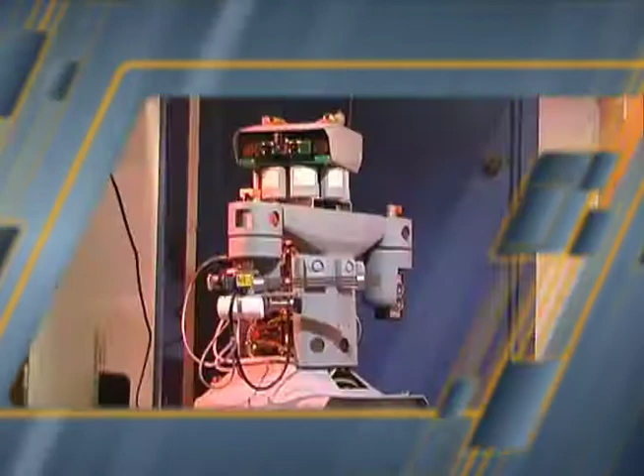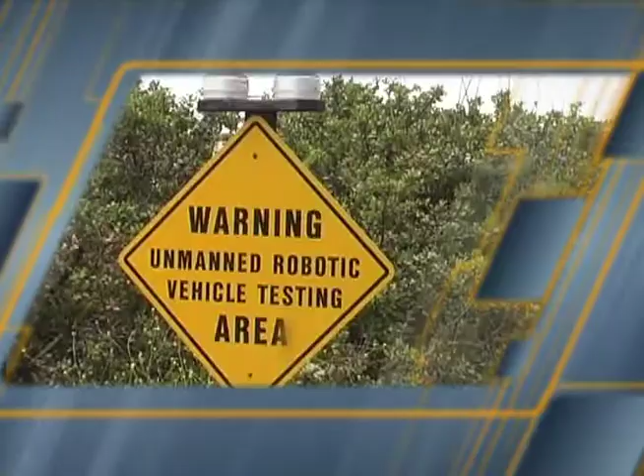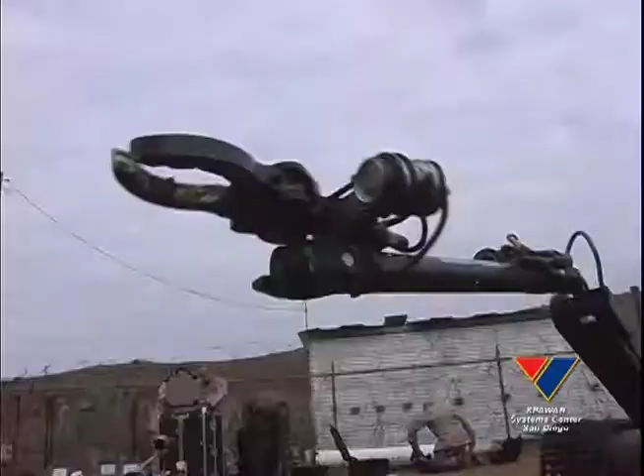The majority of today's unmanned ground vehicles are teleoperated, doing what and only what the warfighter directs them to do. While such systems save lives, lack of onboard intelligence limits the range of possible missions and can put operators in harm's way.

The Space and Naval Warfare Systems Center, San Diego, has been a pioneer in robotics since early work in unmanned undersea vehicles in the 1960s.

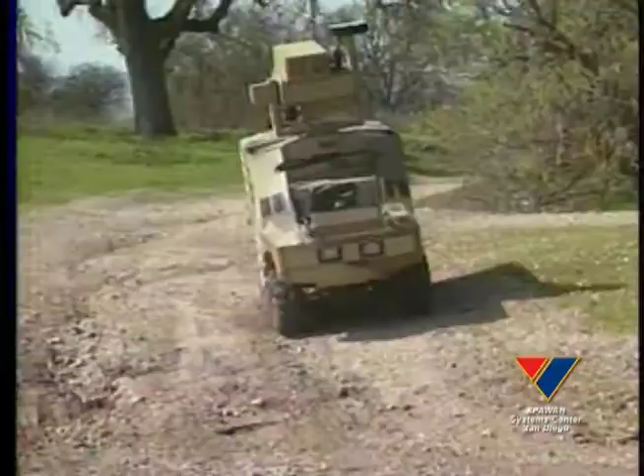The Ground Robotics Program, initiated in 1982, produced a series of teleoperated vehicles performing recon and surveillance for the U.S. Marine Corps, expanding into autonomous security robots for the Army in 1990.

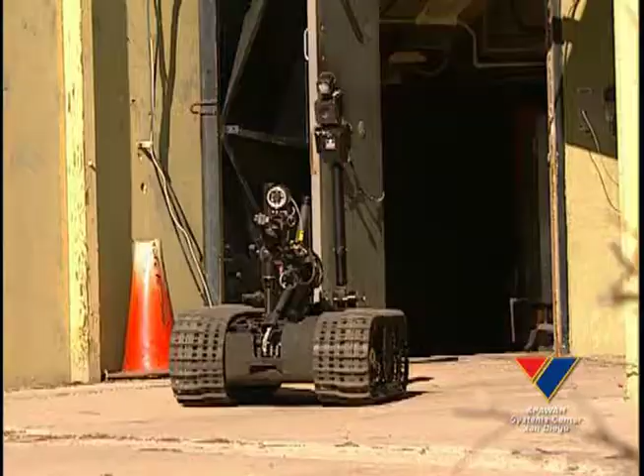The center began supporting unmanned surface vehicles for the Navy in 1999, and later established a focused effort to enhance the autonomy of man-portable systems used in explosive ordnance disposal.

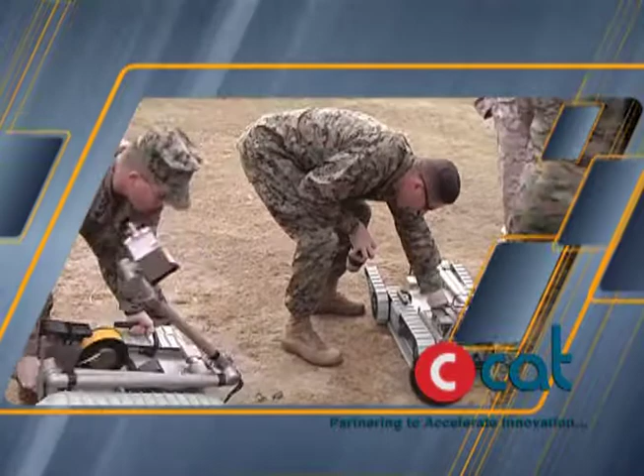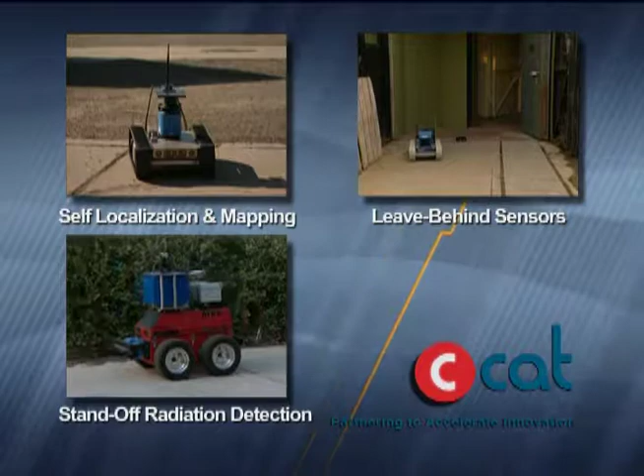The center recently teamed with CCAT, the Center for Commercialization of Advanced Technology, to fast-track the adaptation of several new technologies in support of the warfighter's associate concept, including localization and mapping, leave-behind sensors, standoff radiation detection, and human-robot interaction.

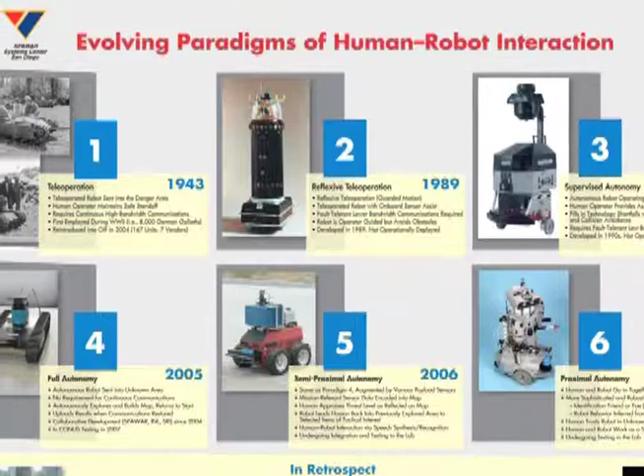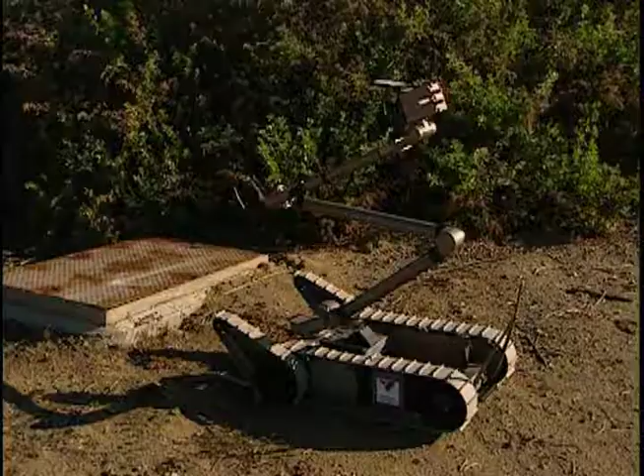Paradigm 1 is basically a teleoperated robot. This is what the Germans used in World War II, and this is actually what we have over in theater today. You have an operator who controls the robot with a joystick, and basically the robot has no onboard intelligence and no sensors.

Anything you want that robot to do has to be controlled by the operator. The problem with this is the operator has to carry a very bulky control unit, and secondly, he loses all situational awareness about what's going on around him.

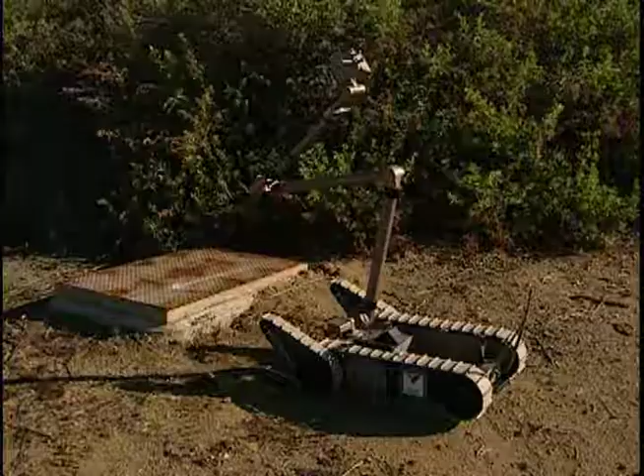If you've ever tried to talk to a kid playing a video game, you'll understand the dilemma. Basically, they don't even hear what you're saying. So this exposes the operator to danger in an environment that's inherently hostile.

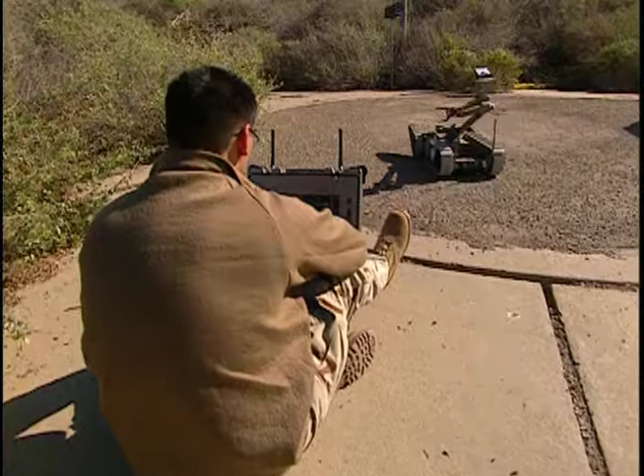Another drawback to teleoperation is that it requires a high-bandwidth communications link. Commercial off-the-shelf RF systems are not optimized for applications involving mobility and generally require an unobstructed line of sight.

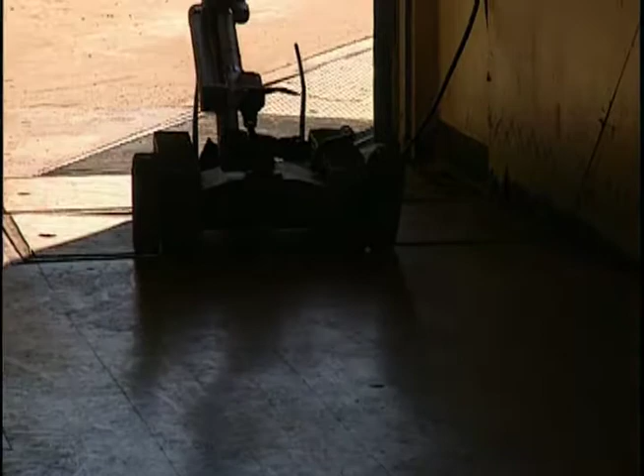For example, as soon as the robot enters this underground bunker, communications are lost and the robot slows to a halt. Risk to the human operator is significantly increased as he's forced to relocate the controller closer to the bunker entrance.

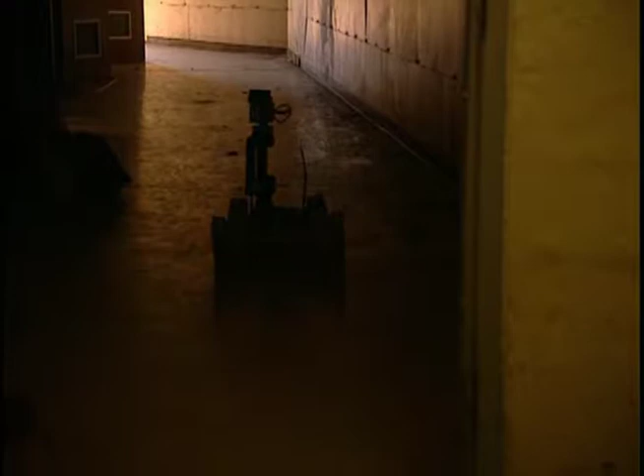As the robot penetrates deeper into the underground environment, the video quality typically degrades due to signal occlusion and multipath interference. In addition, when ambient light falls below minimum acceptable levels, the quality can become even worse.

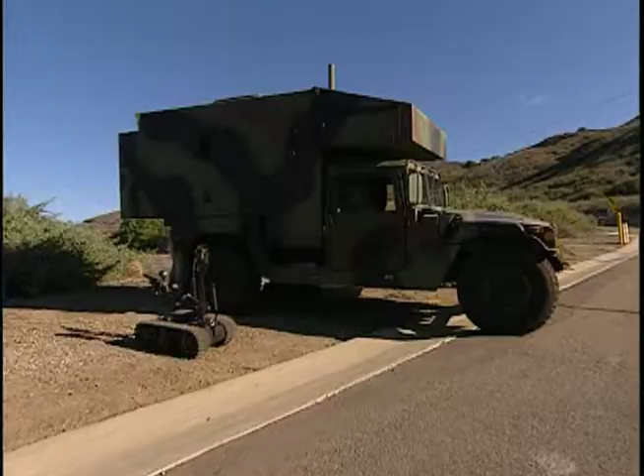A second major shortcoming to teleoperation is limited operator awareness of what is going on around the robot. Even with good communications, it's hard to get a clear tactical picture from a narrow field of view camera situated very close to the floor.

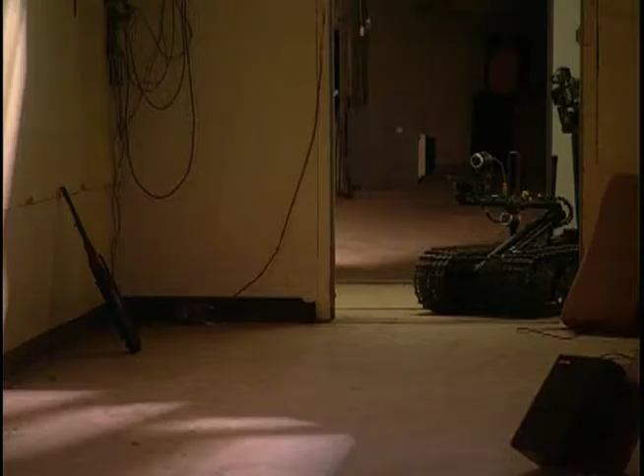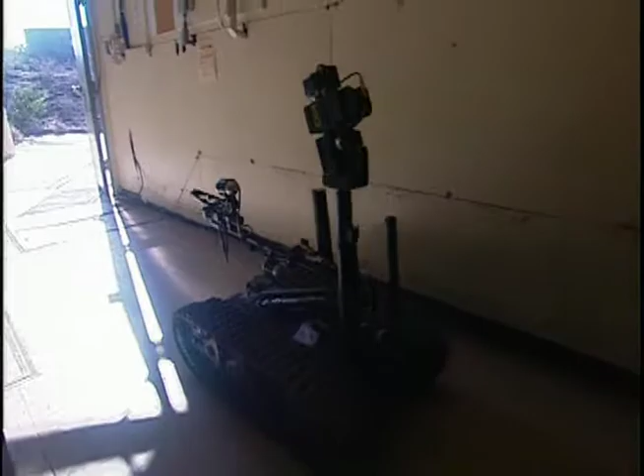Here, as the robot turns to negotiate a doorway, a weapon leaning against the wall in plain sight could escape notice due to lack of peripheral vision. The problem can be further complicated by uneven lighting conditions, such as this brightly lit exit next to a darkened corner.

Paradigm 2 is essentially the same thing. You still have a teleoperated robot, but you've now enhanced its ability to maneuver with sensors on board that can detect obstacles and maneuver around them.

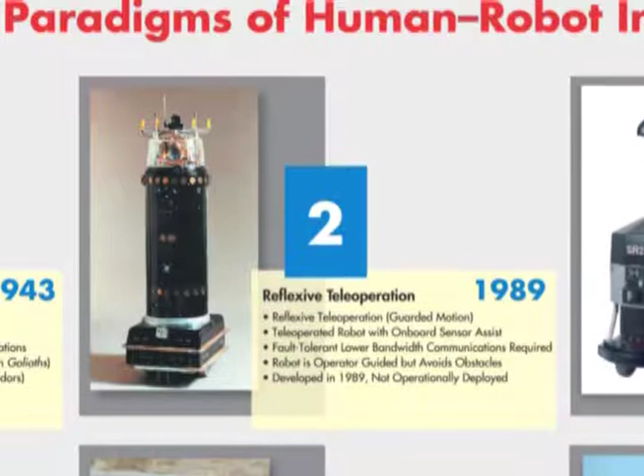The analogy is kind of like riding a horse versus riding a motorcycle. If you point a motorcycle at a tree, you're going to hit the tree. Most horses are smart enough to go around the tree, even though you may be directing the horse directly at the tree.

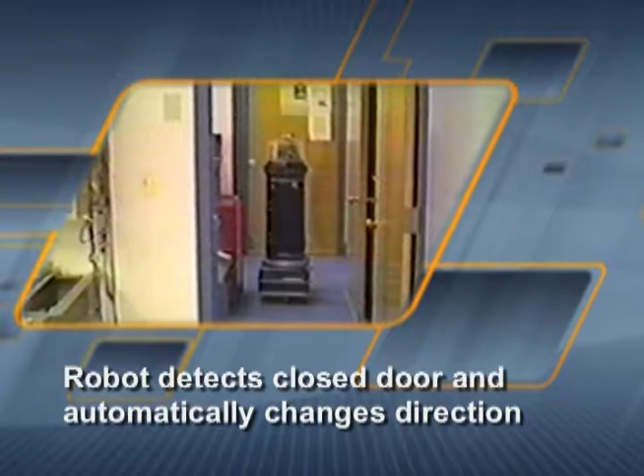So we developed this capability in 1989 in the laboratory. It just hasn't been transitioned down to the user who's operating equipment out in the field.

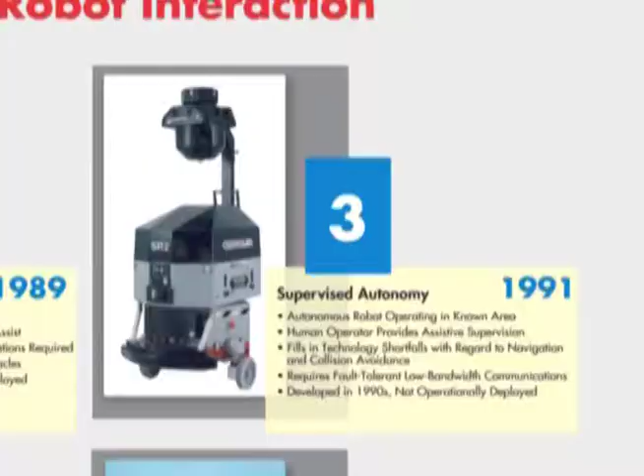Paradigm 3 we call supervised autonomy. We developed this capability in 1991. And essentially, the robot is now autonomous.

It has onboard computers that can help it plan paths and navigate and not run into anything. But there's still a human in the loop supervising the system, filling in for the technology deficiencies.

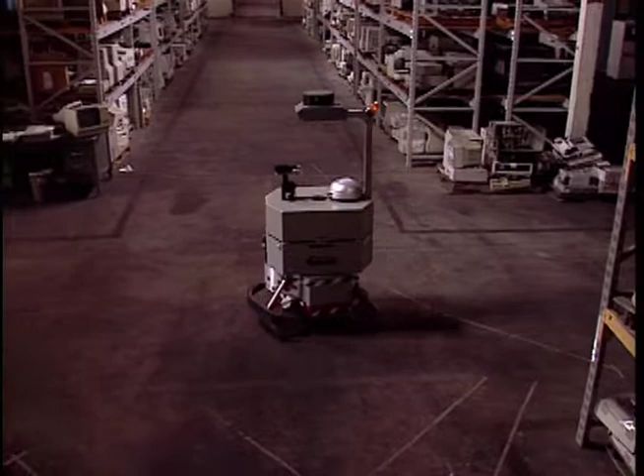One example is the human has to provide the robot with an a priori map of its surroundings so it then knows how to maneuver from one spot to the other.

Secondly, if the robot were to encounter an unknown condition like fire, smoke, flooding, or an intruder, the human steps in at that point and tells the system what to do next.

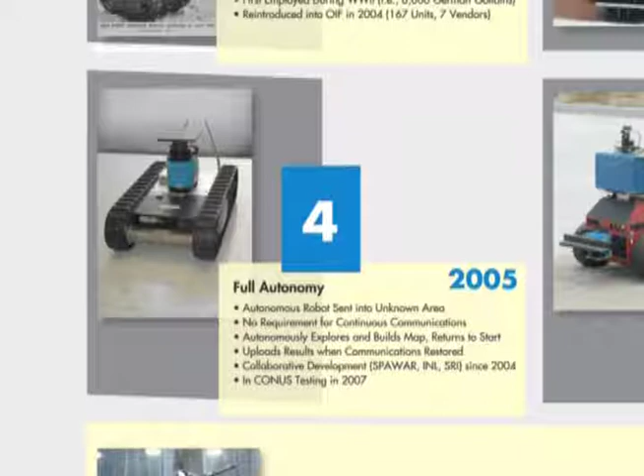Paradigm 4 is what we call full autonomy, and in this scenario, the robot requires no guidance from the human whatsoever, other than a high-level direction as to what you want it to do.

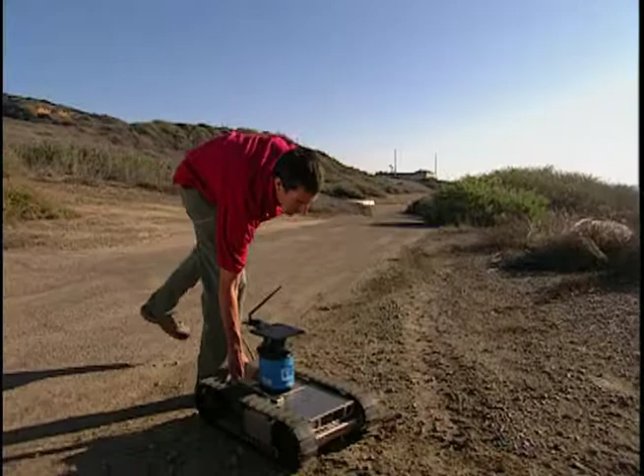This is a conventional iRobot PackBot chassis, which we've modified with a couple of payloads under the CCAT program, which provide a lot of additional capability.

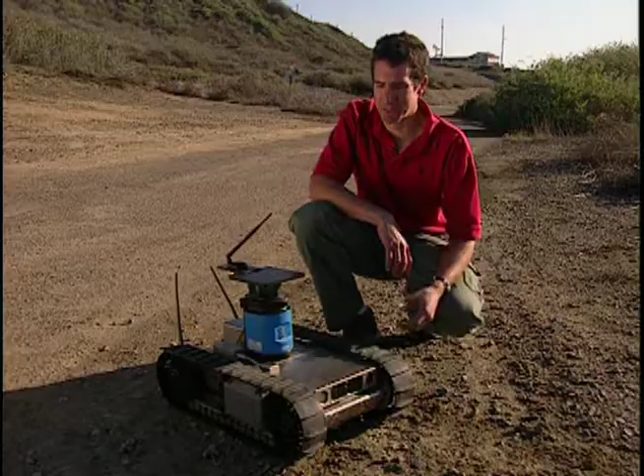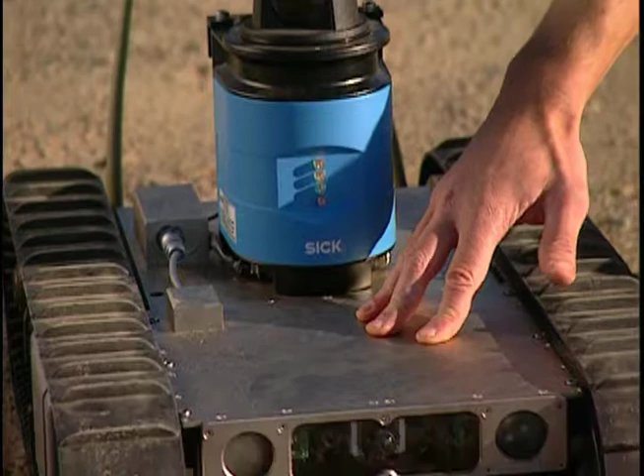One of the most important capabilities is the ability to sense things in the environment, for obstacle avoidance, mapping, and localizing the robot. The most obvious one is a laser, which measures distance very accurately in a 360-degree range around the robot. We also have a stereo sensor, which does the same thing with a little less range, but it's a three-dimensional sensor, giving us a much fuller representation than a laser alone would give.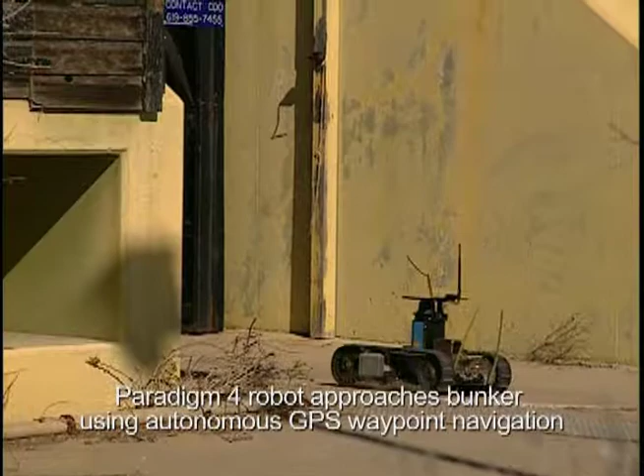This new technology has been incorporated into the Autonomous Robotic Mapping System, or ARMS, scheduled for initial user evaluation in 2008. ARMS automates the risky and labor-intensive task of exploration in unknown or hostile environments while providing extremely accurate maps of the structure. The augmented virtuality representation shown here is based upon the Idaho National Laboratory's 3D interface.

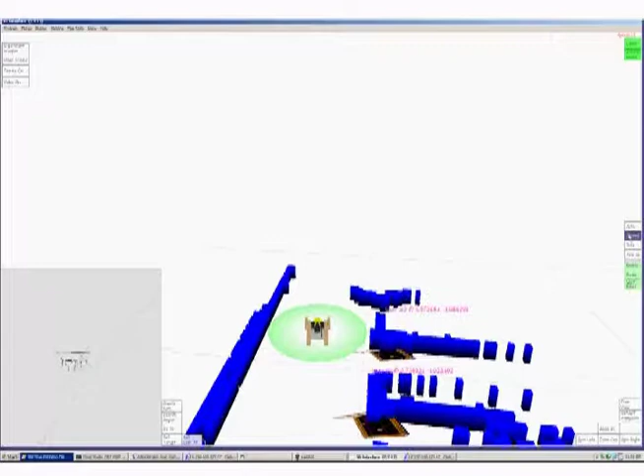This map shows walls and rooms with far greater accuracy than a hand-drawn map. Detected openings on the right side of this hallway, for example, are marked with doorway icons for later reference.

If communications are lost, the robot can still complete its search and clear mission and then return to the original point of entry.

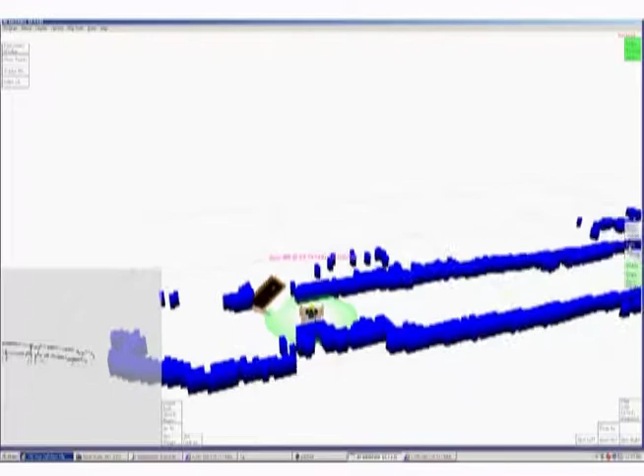So basically the key benefit of this system is it allows us to send a robot into an unknown area. It can map it out, find any dangers before the warfighter has to go in there, and it can do that all on its own, even if it loses communications.

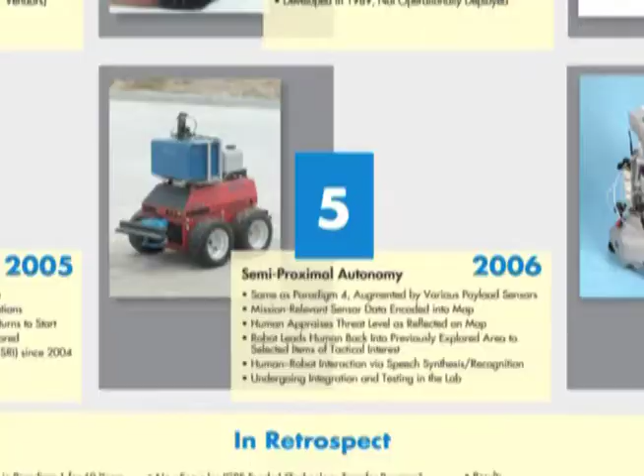Paradigm 5 is what we call semi-proximal autonomy. It's very similar to Paradigm 4, in which the robot enters an unknown area, builds a map, and comes back out and provides that map to the operator.

That's a big start in the right direction, but it would be even better if that map were annotated with anything the robot found that was of tactical significance, things the operator would want to know about — explosive residue, human presence, weapons, things of that sort.

So in this scenario, we have equipped the robot with more sensors that allow it to detect that type of information and encode it into the virtual model, and then come back out and upload that.

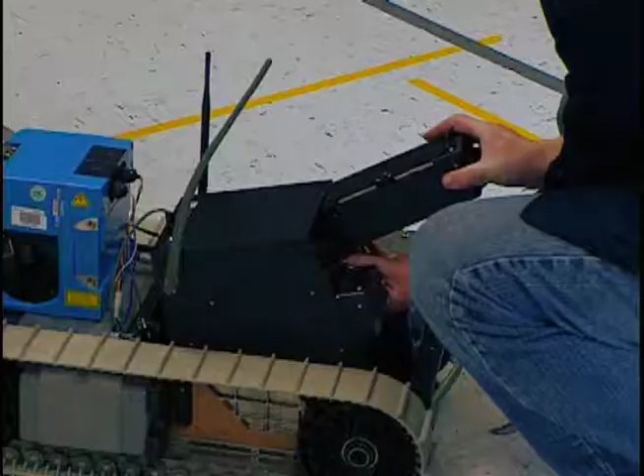This current setup incorporates 3 different packages. It has a computing payload along with a SICK lidar for autonomous mapping, as well as obstacle avoidance and computation. It also incorporates an ADCR deployer and leave-behind sensor bricks.

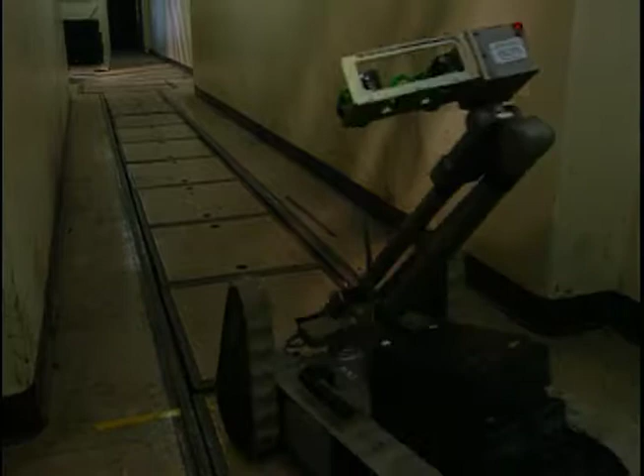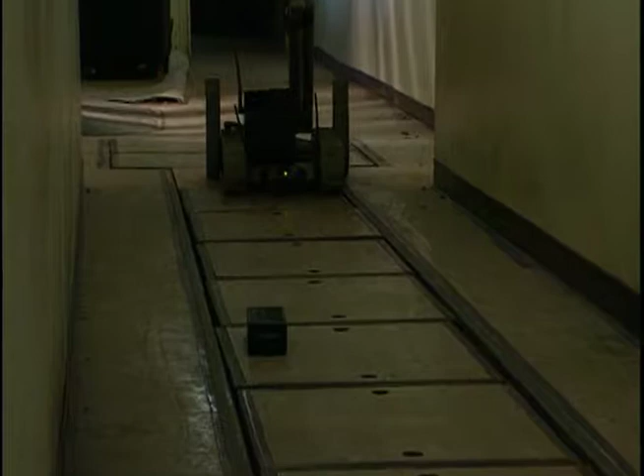The ADCR deployer was developed as an interim solution to lost communications under the Automatically Deployed Communication Relays program. The deployer module ejects a self-righting relay brick whenever the RF signal strength falls below a predetermined level. With 6 bricks, effective range is substantially extended without increased operator risk.

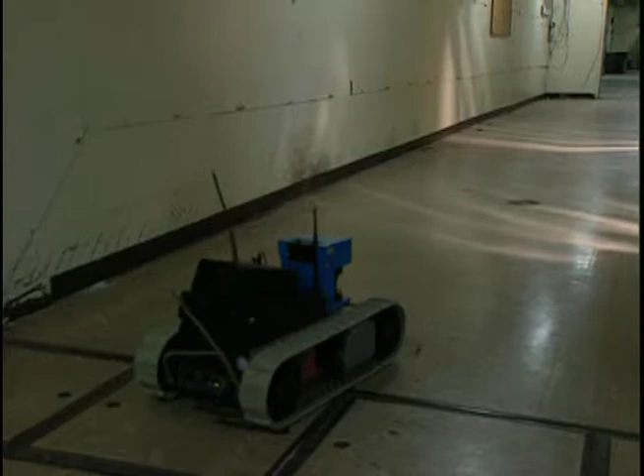The Bot Drops payload, developed by Corner Turn, uses a reconfigured ADCR deployer module to eject leave-behind motion sensors that can detect anyone re-entering the area after a clearing operation.

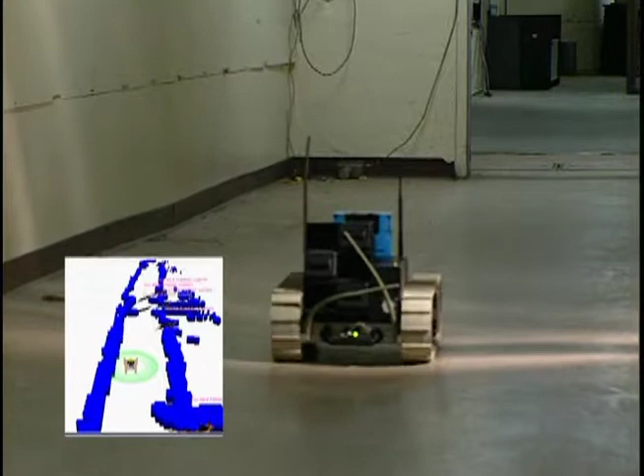The robot autonomously explores the structure as before, encoding any found objects of tactical significance into the augmented virtuality model. Once the search is complete, the floor plan representation is analyzed to determine optimal drop points for motion sensor deployment, typically building entryways and hallway intersections.

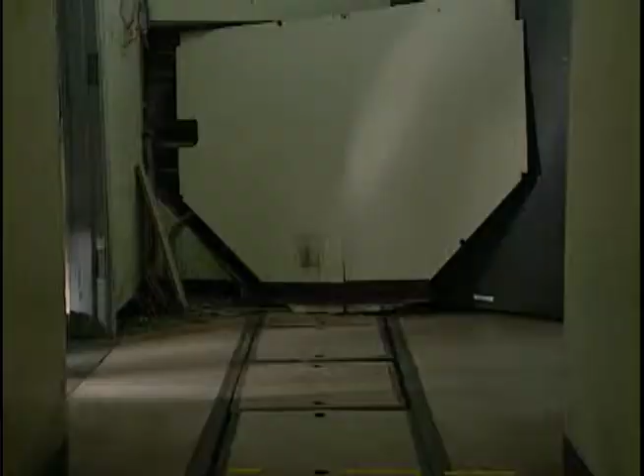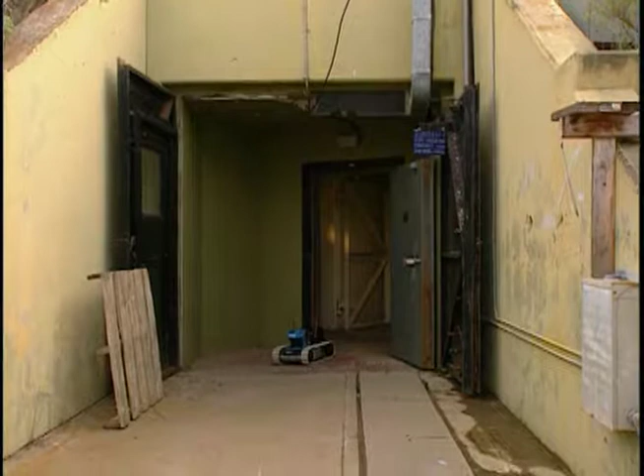The robot then revisits each chosen location to deploy the sensor units, which are linked together via a low-bandwidth RF mesh network. Once outside the structure, the robot ejects a special terminal node that provides the mesh network with a satellite uplink for reporting any subsequent intrusions.

The sensor units shown in this feasibility demo are laboratory surrogates for actual hardened systems currently used in theater.

The Radsite standoff radiation sensor, developed by Space Micro, allows a robot to not only detect and identify a distant radiation source, but also determine its bearing.

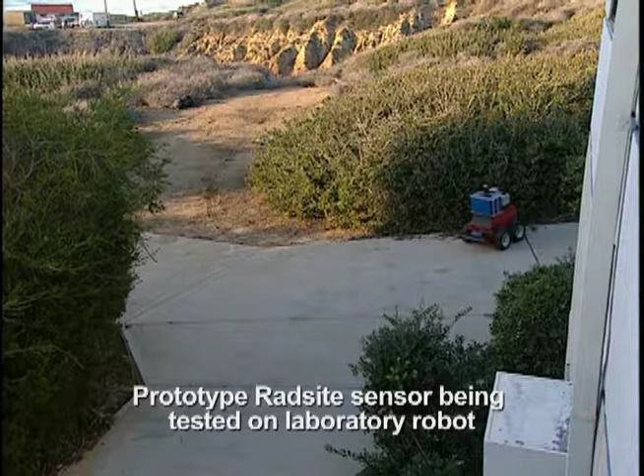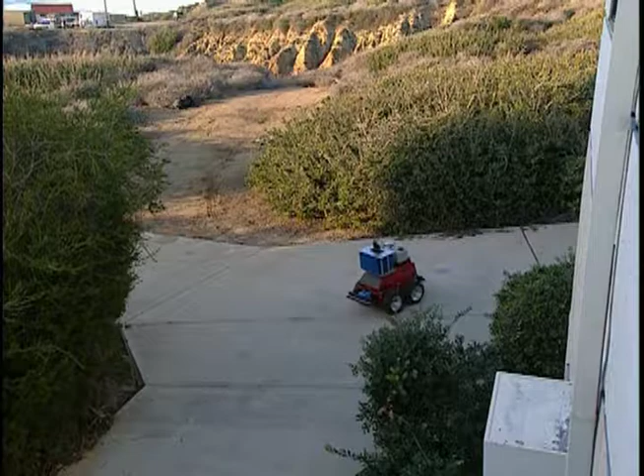Once an initial vector to the source is detected by the sensor, the robot alters course slightly and takes a second reading to calculate range through triangulation. The robot then moves directly to the source location, correcting its heading as needed.

The ability of this standoff sensor to control the robot's search strategy can significantly reduce the time it takes to locate a hidden radiation threat.

We're developing a technology, supported by CCAT with a grant, and the technology is for radiation detection.

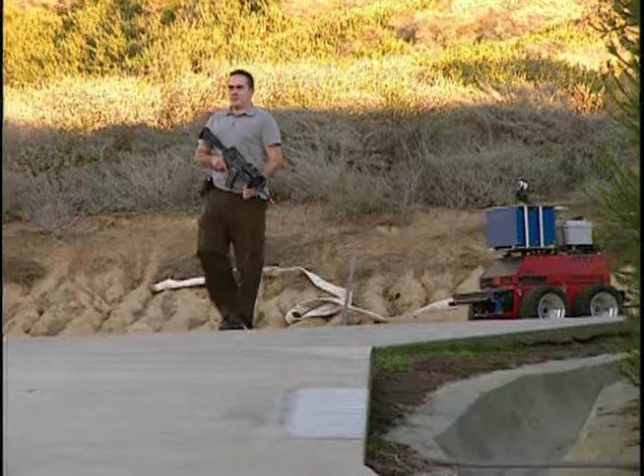What the CCAT grant has enabled us to do is something a little bit different. We not only detect and identify that there's radiation in the area, but we also locate where it is. The term semi-proximal implies that the human and the robot are going to work together as a team now that the threat is known in advance. The robot will accompany the warfighter back into the area of interest, helping to protect him en route.

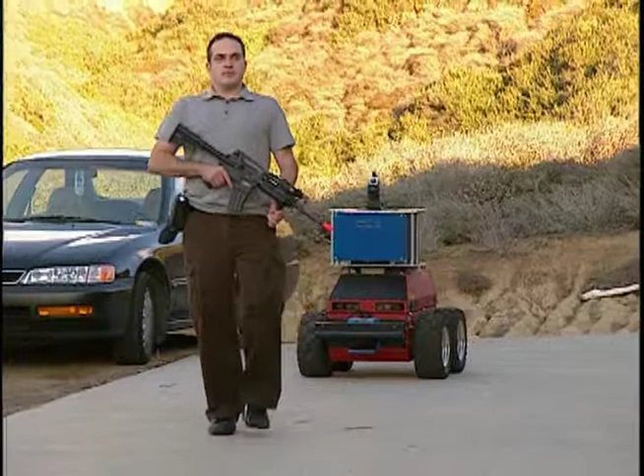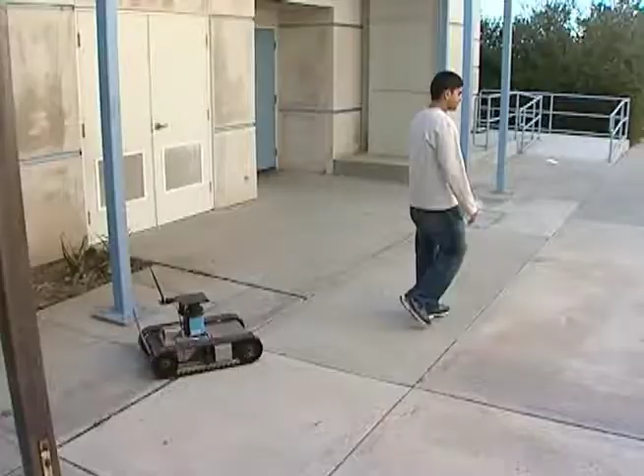In support of the warfighter's associate concept, the robot currently has 5 different sensor modalities that allow it to keep track of its partner's location. Here we see a following behavior, supported only by the onboard laser. Similar performance is obtained using a vision-based technique. Such sensor redundancy is necessary to ensure reliable performance under dynamic, real-world conditions.

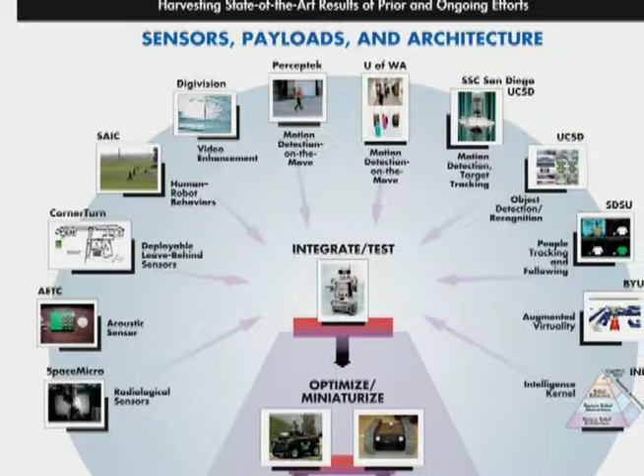So in the second year of technology transfer program, we've then started to bring in other sensors and mission payloads so that a robot could not only self-navigate in its environment, but also to allow it to sense other things of tactical significance. Our partnerships with INL and CCAT have expanded the number of technologies that we have been allowed to evaluate for the warfighter.

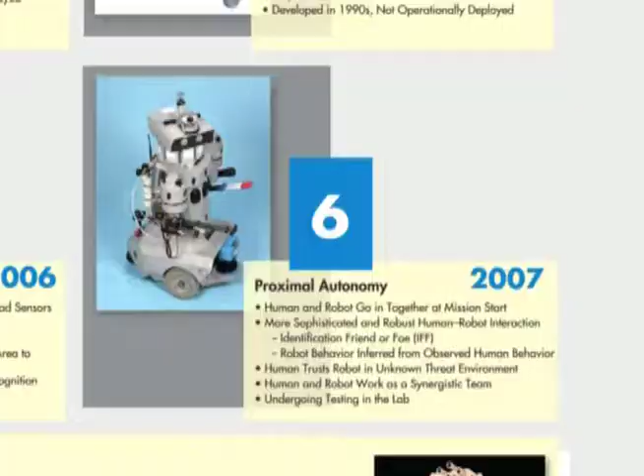Now, Paradigm 6 is basically identical to Paradigm 5, except that this time the human and the robot go in together at the start of the mission. The technology is matured to the point and is trusted well enough where the human and the robot will go in and act as a team before the threat is known in advance.

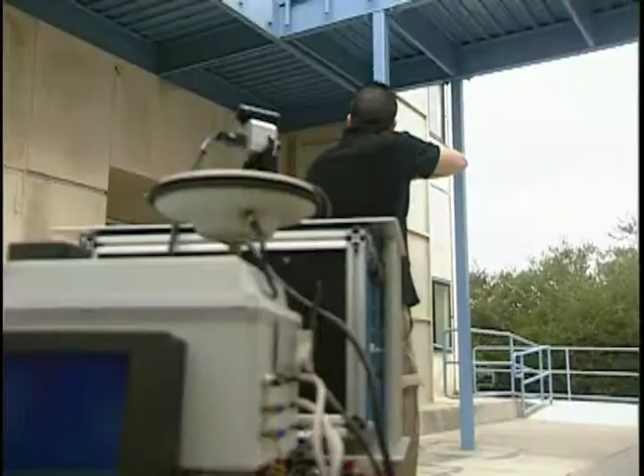In this Paradigm 6 scenario, the robot infers what it should do based on its perception of what the human partner is doing and what the threat is in the surrounding environment. When the warfighter flips off the weapon safety, for example, the robot shifts its visual attention from following its partner to searching for a potential threat.

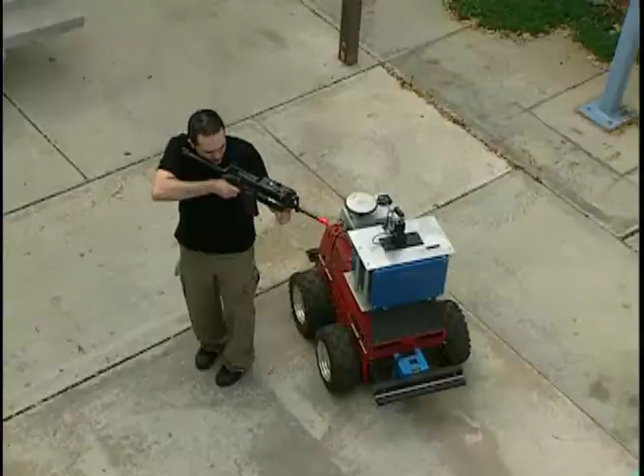If the warfighter begins firing his weapon, the robot can automatically execute supportive behaviors to shield its partner and/or distract the enemy. The robot returns to follow mode when the weapon is made safe, then automatically initiates another shielding maneuver as the warfighter engages a new threat.

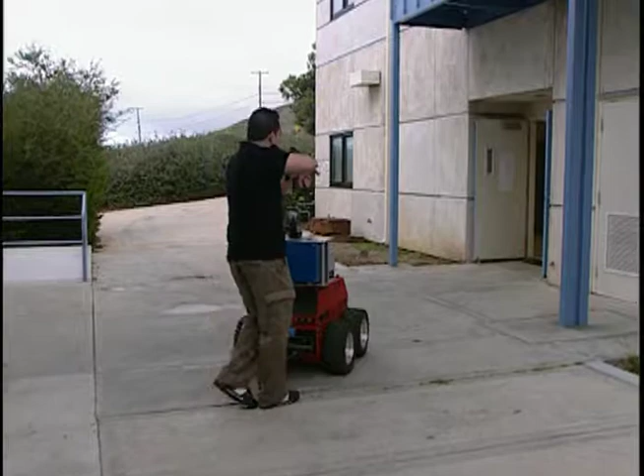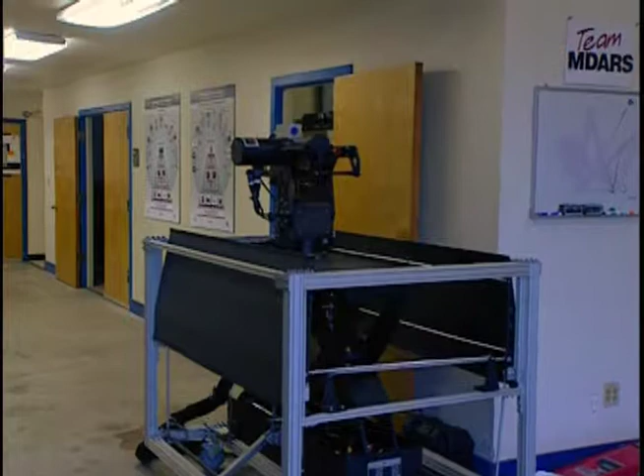Developed by SAIC Englewood, the instrumented airsoft M4 machine gun serves as a laboratory surrogate for similar hardware pursued by the Army's Future Force Warrior program. The Unmanned Systems branch already has extensive experience in the development of automated target acquisition and tracking systems for non-lethal weapons.

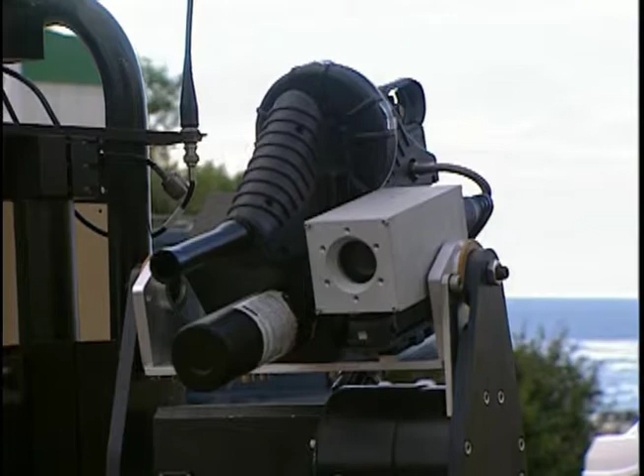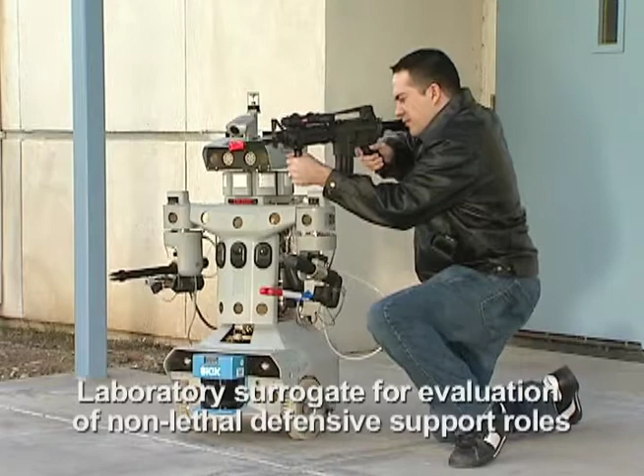Obvious synergy can now be realized by merging this advanced fire control software with proximal human-robot interaction behaviors. Here, the robot's weapon automatically follows that of the human partner, allowing its target acquisition system to precisely lock on and track any perceived threat, firing only if commanded by the warfighter.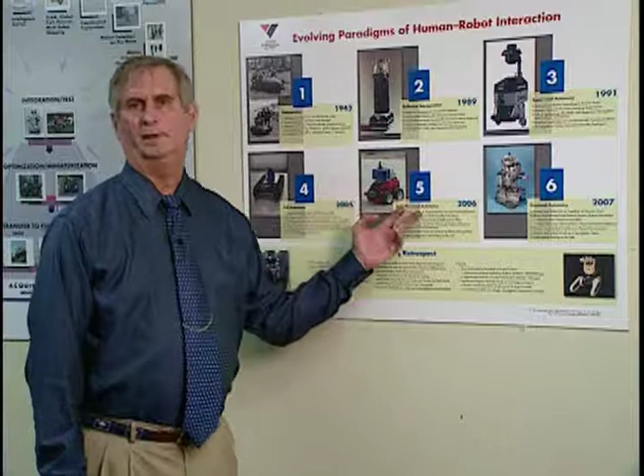So what's exciting to me is after being stagnated in Paradigm 1 for 65 years, in just 2 years of working with CCAT and our other collaborators, including the Idaho National Laboratory, we have leapfrogged ahead to Paradigm 4, and we have elements of Paradigm 5 and 6 already working in the laboratory, which we didn't expect to see for 10 or 15 years yet.